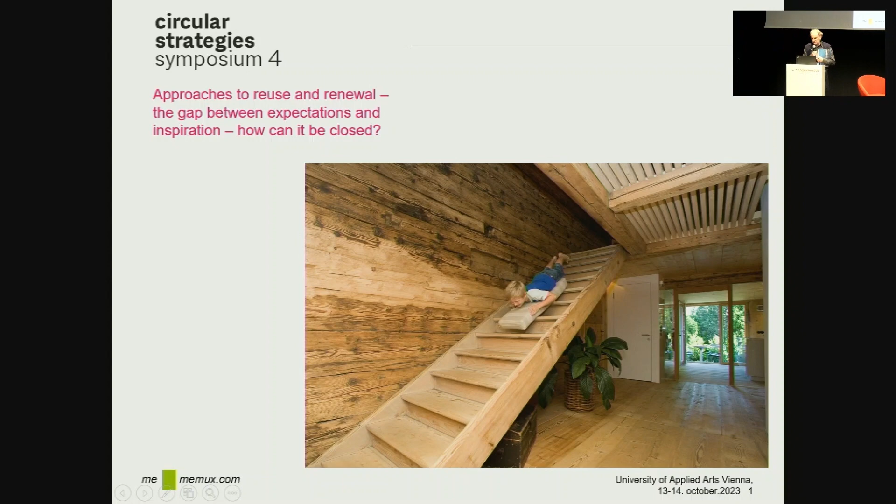It's all about low-tech, about reuse, about renewing buildings, but not only in thinking of reusing the materials or the building parts. It's more about the ideas that lie behind these construction types which our forefathers developed years ago. So I'll show you first some images of buildings, to show that by using the construction itself, the ideas of construction types of flooring, ceiling, and materials, we come to new solutions, and the combination will be the interesting part. I have to show you a lot of pictures, because only the practice of reusing things and adding new things can show that this combination will be an interesting model for the future.

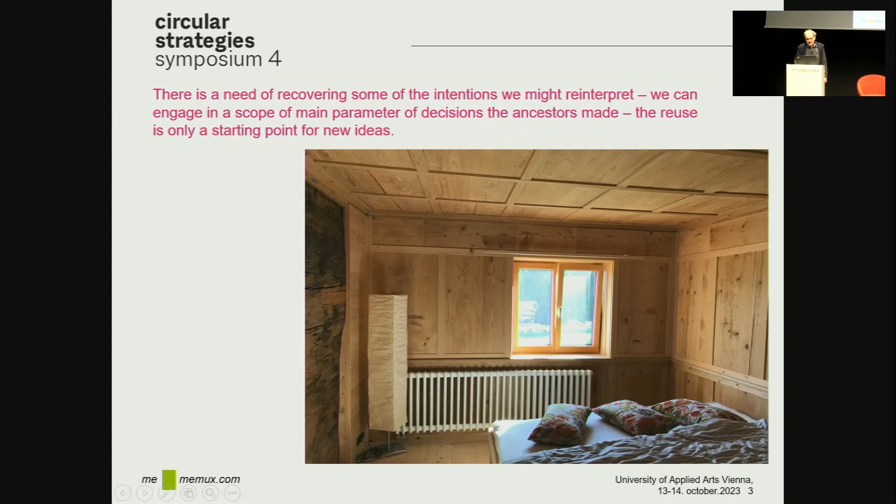I'm convinced that the surfaces of these materials and the connections, the low-tech approach, the few construction connections we need, will improve new design and will be interesting for each other to find potential in these kinds of things we find.

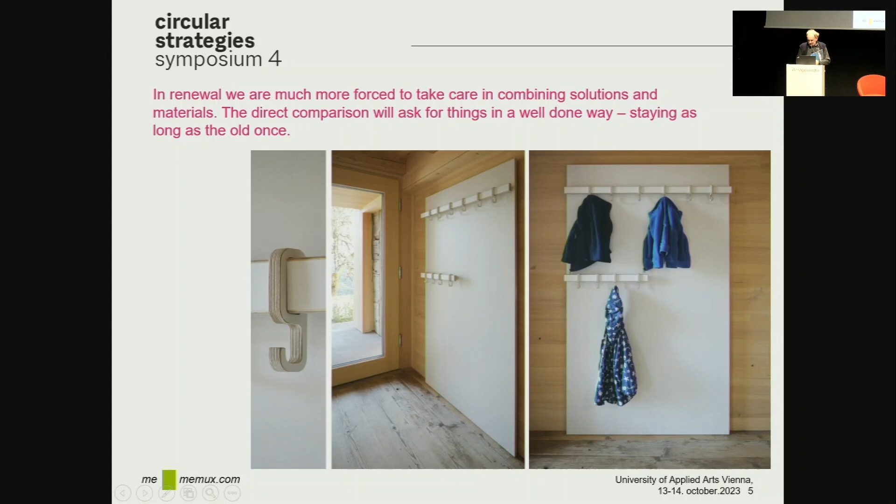So I'll show you combinations of materials and developments we did with craftsmen, who were very interested to do this because of the research I did before. I could show them things they didn't know either, because the last two generations, my father's and grandfather's, had lost some things, and we could show that there were interesting solutions even 400 years ago.

So the main approach is about dendrochronological studies. One colleague of mine, Klaus Pfeifer, did studies of this kind. He's worked on this for 20 years, more or less, and together we did a lot of research in buildings like this.

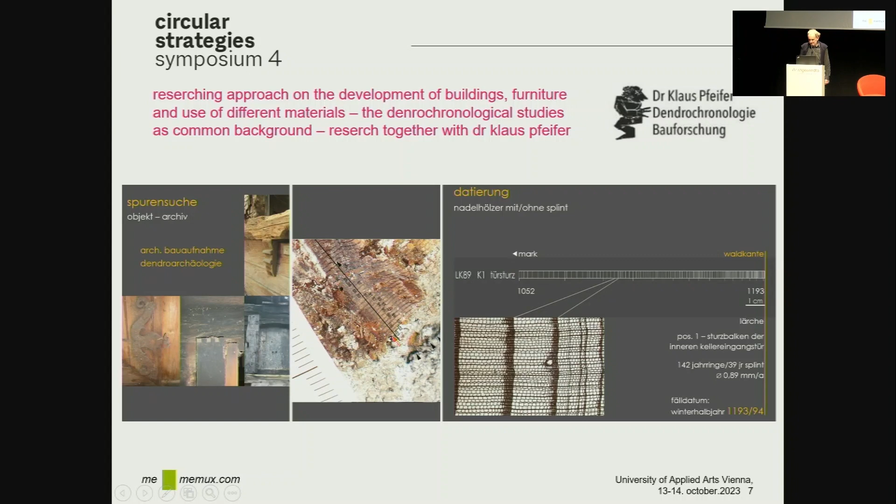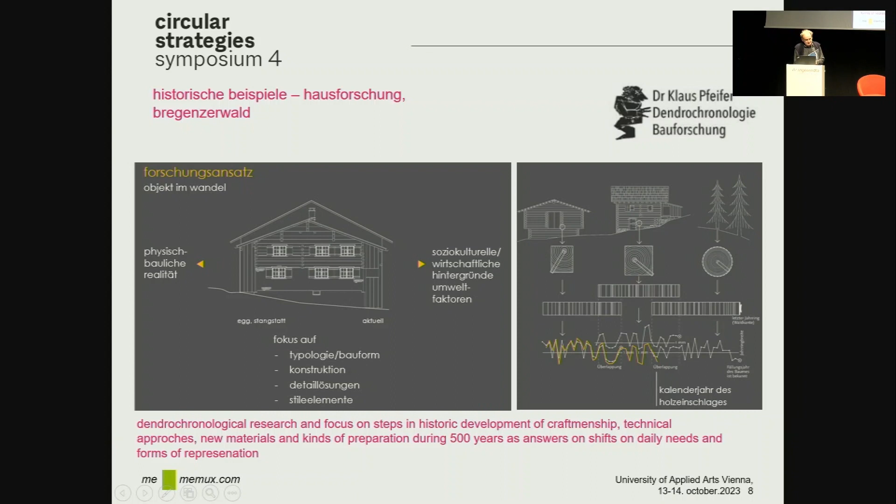So we can explain what happens in a building like this. There are more or less 3 or 4 renewing steps, and these renewing steps always reflect the development of craftsmanship, new needs, and the demographic and cultural development. We can show that in one of these buildings there are more or less 3 or 4 steps, in the Bregenzer Wald.

That's a common strategy: to renew and use the old construction by overlaying it with new possibilities of technical approach. In this comparison, the left side shows the 400-year-old shape of the beginning of the house, and the other is 300 years later. It was 400 years old when we researched it, but the design is more or less 100 years old, so in between there were 300 years of different interventions.

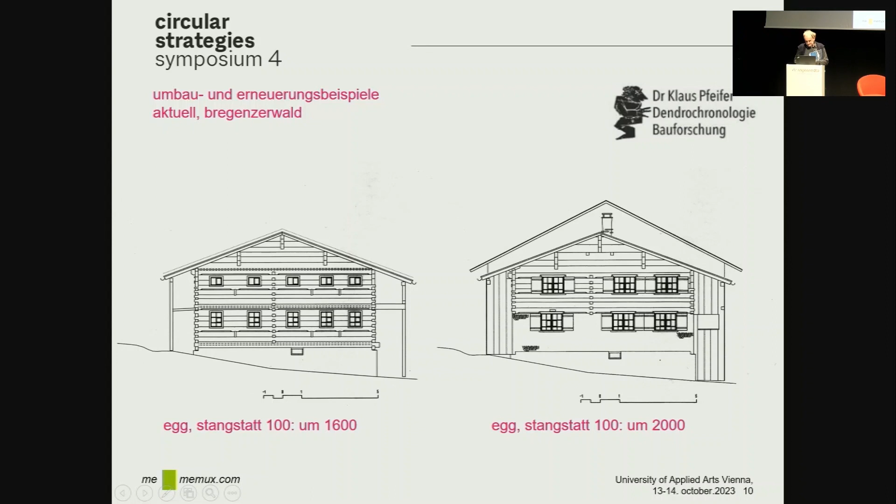Here's the next step. If you know the culture of building in the Bregenzer Wald, at the end you find housing like on the right side—the typical image of a Bregenzer Wälder house. But we researched the background of this, behind the timber surface, and found that you can identify the different steps of additions.

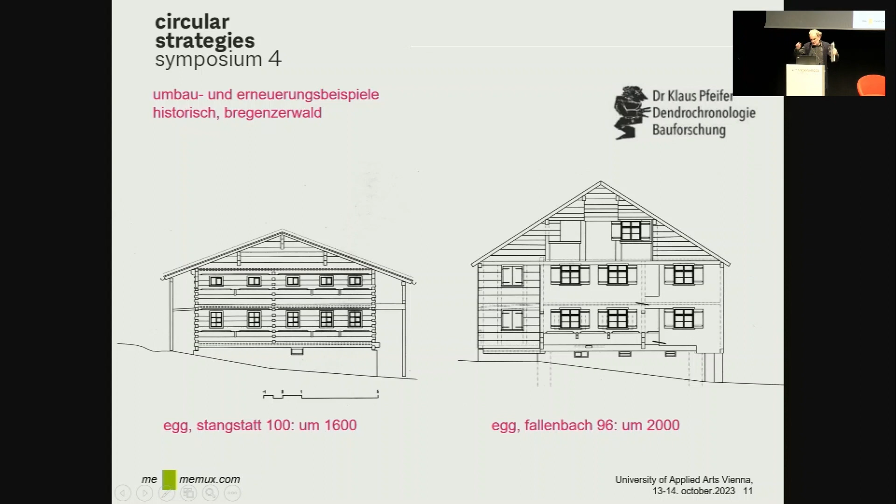The lower part is mainly the same as on the left side. Then on the right side there's an adaptation that was added with steel clamps, and at the end a huge new roof was put on. This kind of renewing and reusing is very typical for the region, I think all over the Alps.

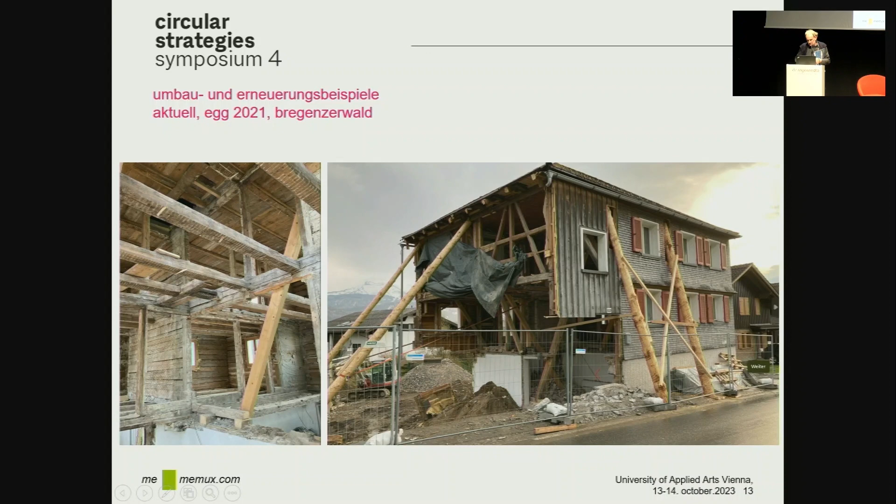So I've been doing some projects in the same way. I'll show you some examples now, not to talk about heritage and respect, but more to show that these structures give the possibilities to find solutions, to renew and reinterpret them, to interact with these solutions to create new spaces, new constructions, and even new surfaces—all the architectural approaches we need to develop.

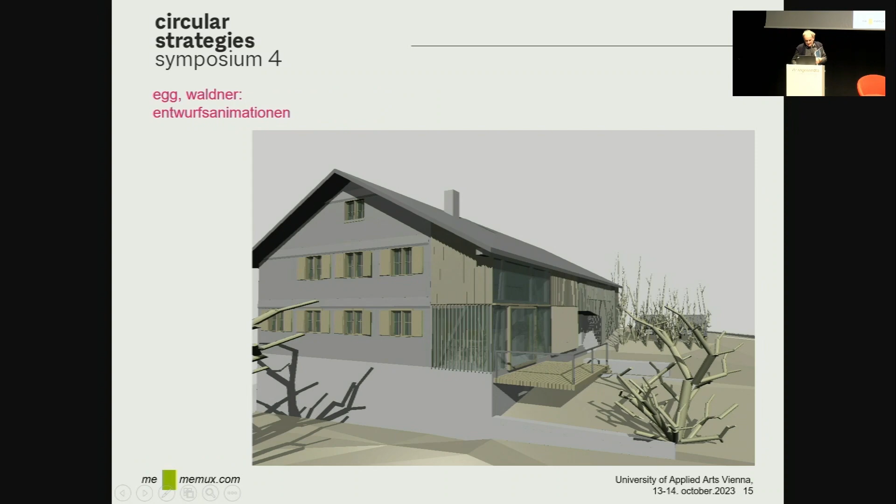Here I show an example I did a lot of years ago. You see the renderings we did, early simple renderings at this time.

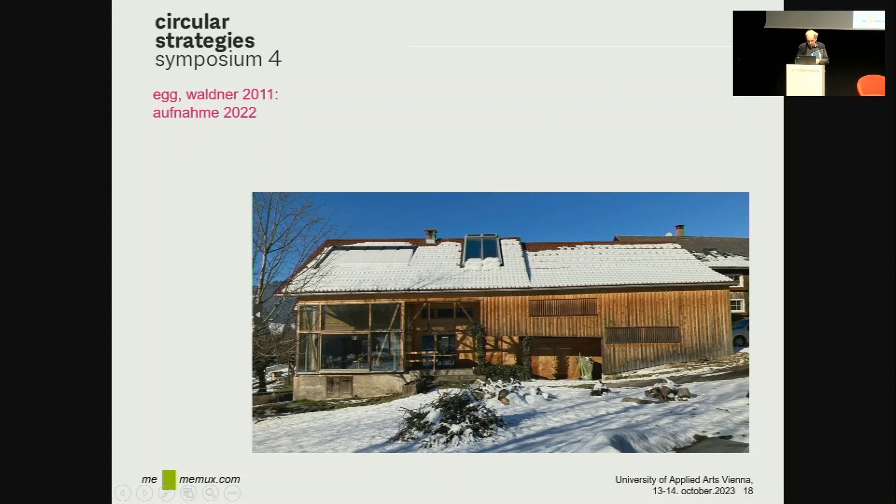I think that's the interesting, even to deal with tiles. We did a new stove with these tiles, and we combined all materials in a very assembling and easy character. So I think it's worth, or it's the main option to practice this.

You have to really search for the main characters, the parameters of the materials, and you find the solutions, as Yves told by the construction view. I think it's also in the view of the surfaces very interesting to keep them, to re-engage what the forefathers thought about in using these materials.

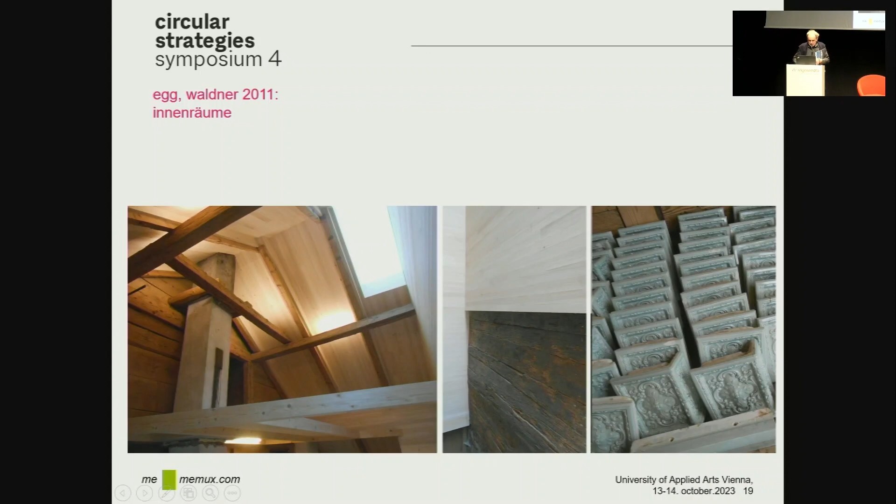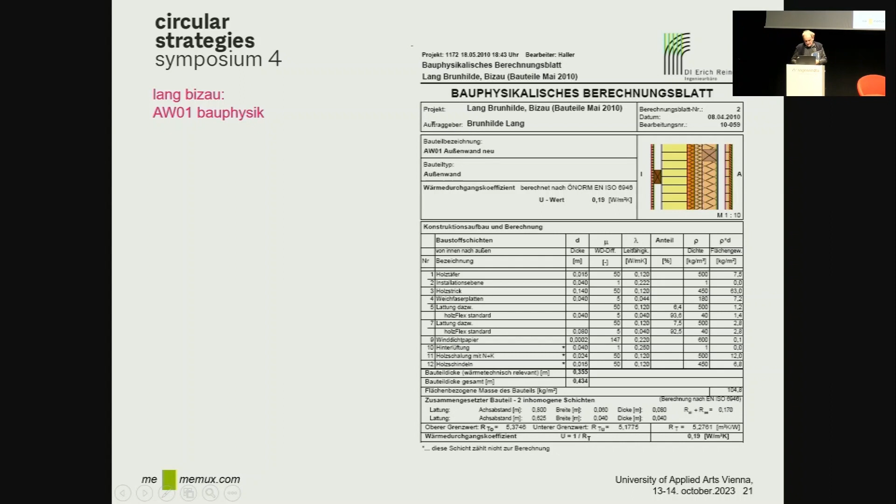We do analysis for sure. We have to do, like it's called Energieausweis, the U-value, how is it called, these calculations. So we don't hide from this kind of things. Either we try to do calculations, we try to show that it will function in future too. All this moisture stuff, moisture barrier, and all these things we try to avoid. So we think that the wooden trunks and the massive wooden walls could keep these things out or have a good transport for all these moisture things.

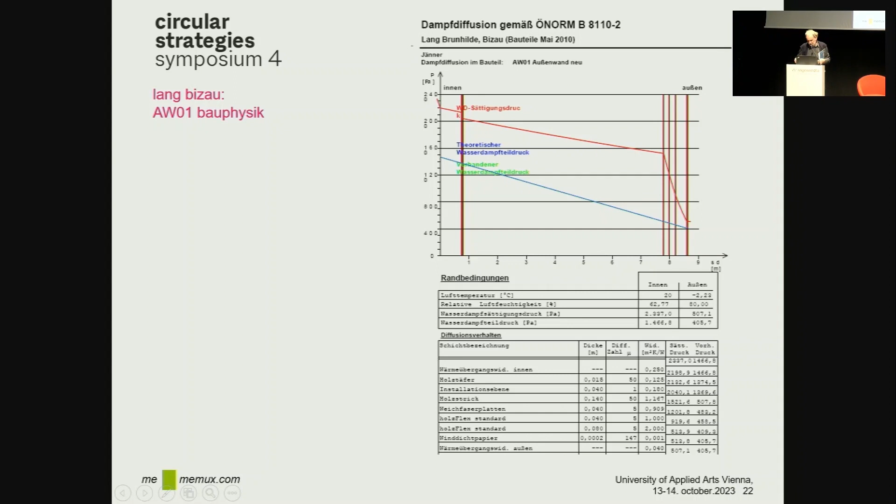Yeah, now I come to the house I did for my own. It's a typical Bregenzerwälder house, farmer house with a barn at the back, and the front house is the living house part. It's all under one roof, and we had the chance to buy such a house. The part in the front, for the living part, had one family, and we could add things in the barn in the backside.

So we did there a house-in-house concept because of the construction, which was more or less 150 years old. I didn't want to go to the walls, I didn't want all the physical problems at the construction, at the wooden construction, so I did this house-in-house concept. Yeah, we did at the end 3 flats, 3 apartment parts, one at the front part, one at the attic, and the third one there where we live now in the back in this barn.

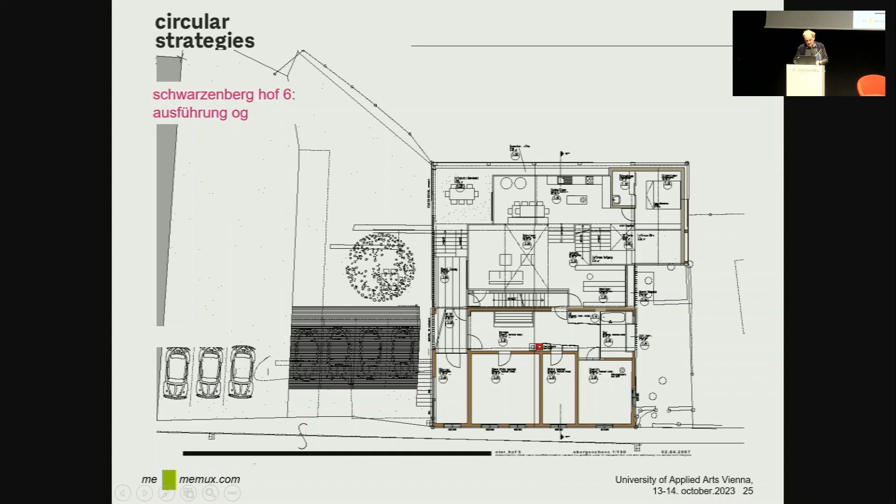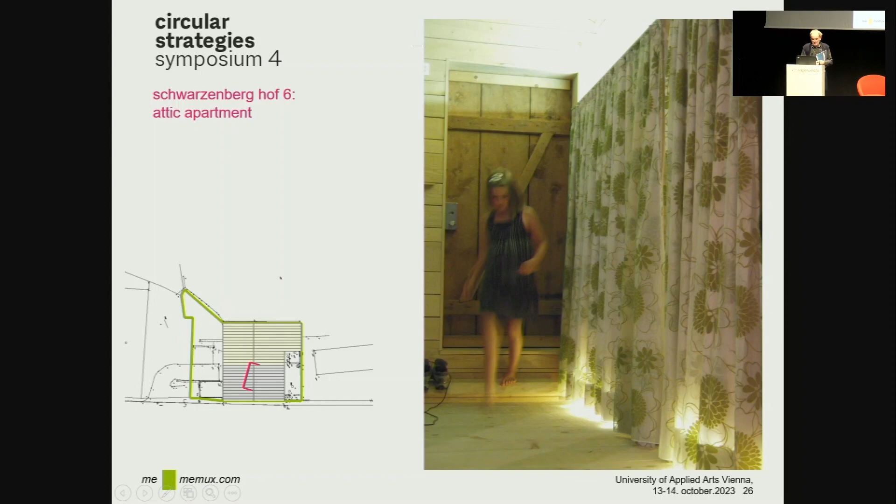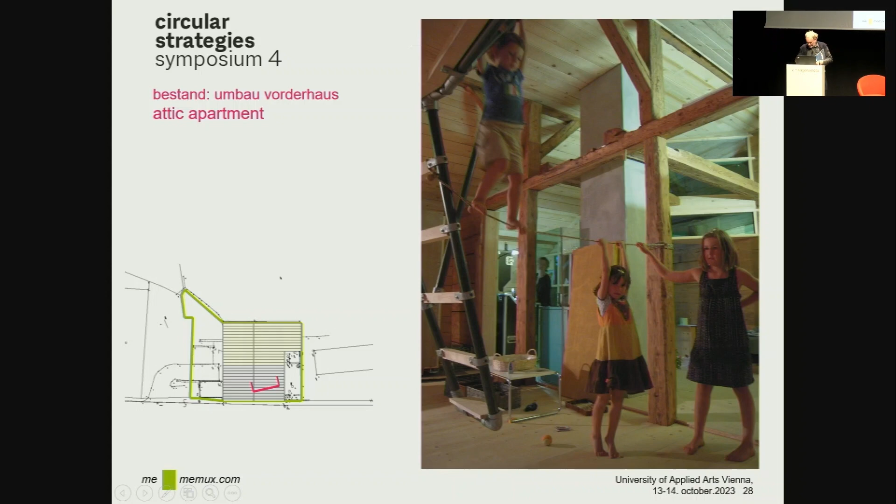Yeah, I show now some images to show you that it would be very inspiring to work with these sites, to have the rooms, to have the space under a roof with huge spans without any columns and like this. This is still old, this is not new. So we could do very free planning inside of the things, and the children still liked it. They were allowed to do a lot of things which normally is not allowed in these rooms because they are very rough and very easy to treat, and even to clean it's not that problem.

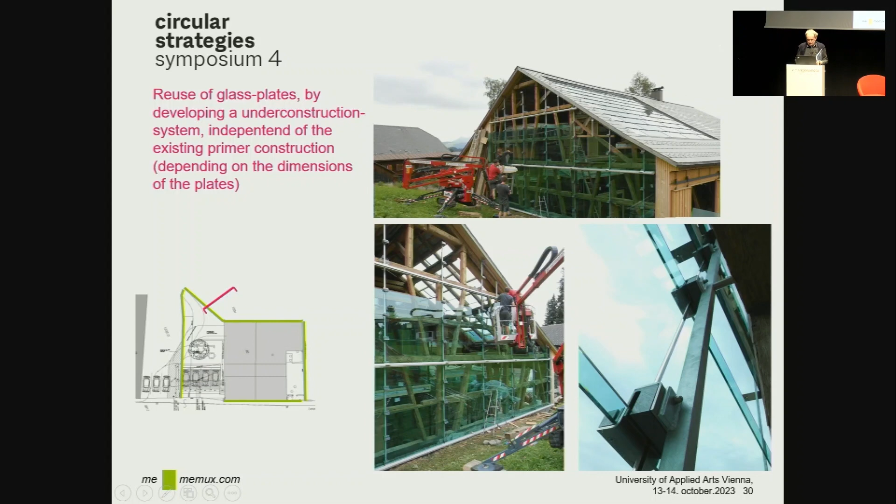So at the end of this part I show you that it is also added by new parts, steel construction, glass plates which are reused, which I could buy, and so I had to do a new second construction in front of the construction of the wooden barn.

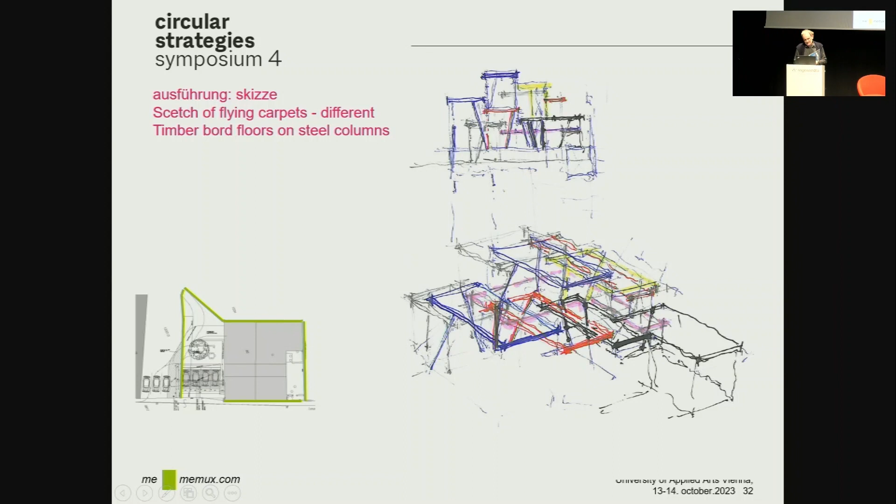Well, I will show you now a main part of this project, which was the development of a wooden floor plate system, which I found in all the houses about 1600. All these houses have the same roof type as I did here. It got lost by the craftsmen, by the carpenters, and we first did this 10 years ago. We tried the same construction type, which we could call a strained board floor.

It's about a conical board which is put into the part. It's important to read this sketch. You see there, I did the signature to this part which is conical, and this is the final part you put in. So you had to push it in at the end, and so it will strain itself.

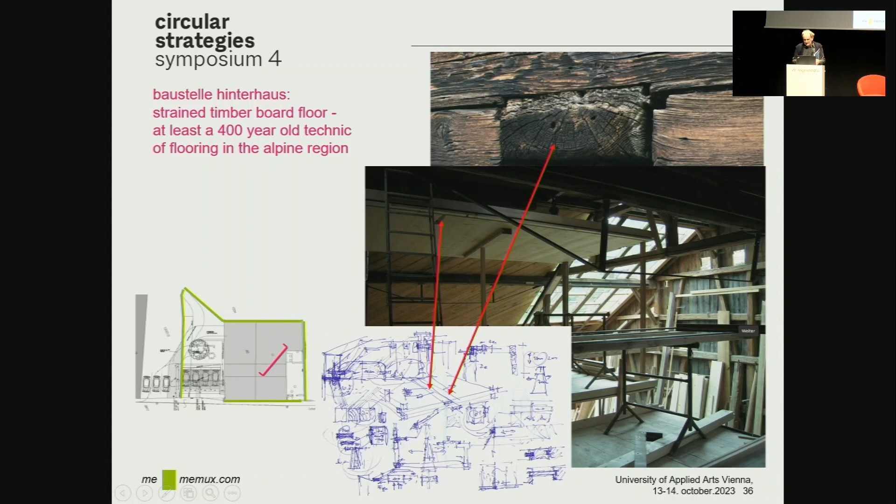It was a well-known technique, but it got lost, I think. And the carpenters of my father's generation didn't know this technique or didn't use this technique. And we started to do this in my house because I wanted to show that this still can be reactivated, this technique, and we can show that it would function nowadays too.

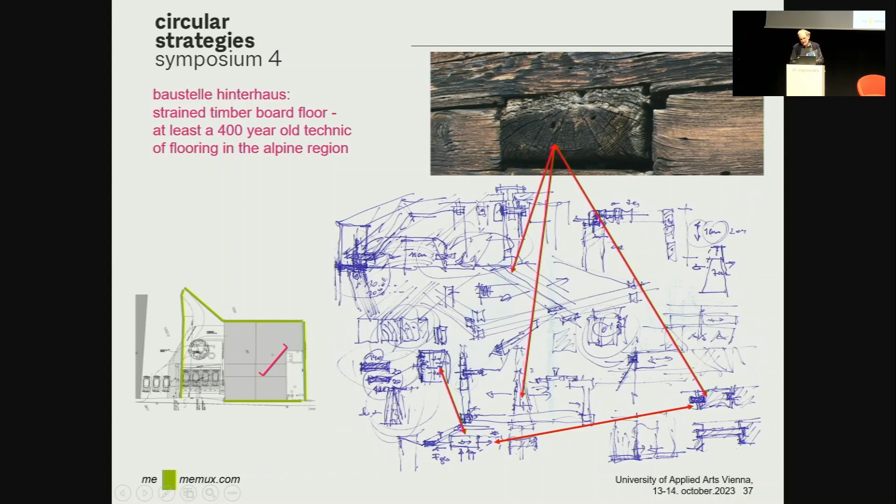Yeah, so it's a big amount of knowledge. What happens by a strained board flooring? It's too much to explain, but you see that we thought a lot about what happens, what has to be done by the craftsmen to come to the same solution as the people 400 years ago. Yeah, and so we searched what would be the advantage, and we found in old books, and they still are the same, the same knowledge.

If you use these trunks in this way, like Eve told, if you have the annual growth structure in a good combination, it's much more stringent, and so you have 20% more forces you can load if you use the wooden trunk like this. I think it's nearly the same idea, but 400 years ago people were thinking that it's good, and so we tried to do it in the same or a similar way.

You see it now at the flooring below. It still is there, the conical board which we pressed in. At the end, we could strengthen this whole floor a lot.

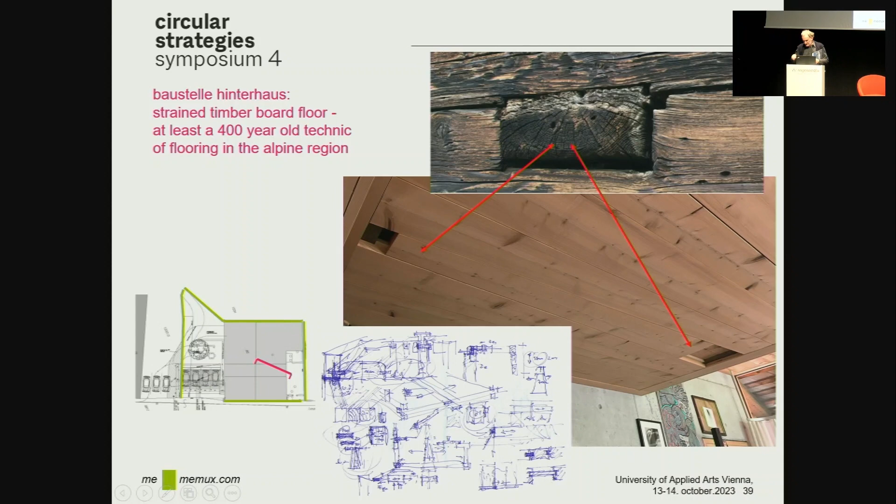We did one thing different to the 400-year-old technique. We didn't have a wooden frame, we did a steel frame, which was much more effective. So we expanded, we strained it in a steel frame, and for me it was like carpets laying on small columns.

So we did a lot of construction renewing, always in kind of low tech, with for example wooden nails instead of steel screws, because the thickness of these wooden nails would be the same as 20 screws. So it's low tech and simple technique. If you have the right carpenter, you can do this anytime.

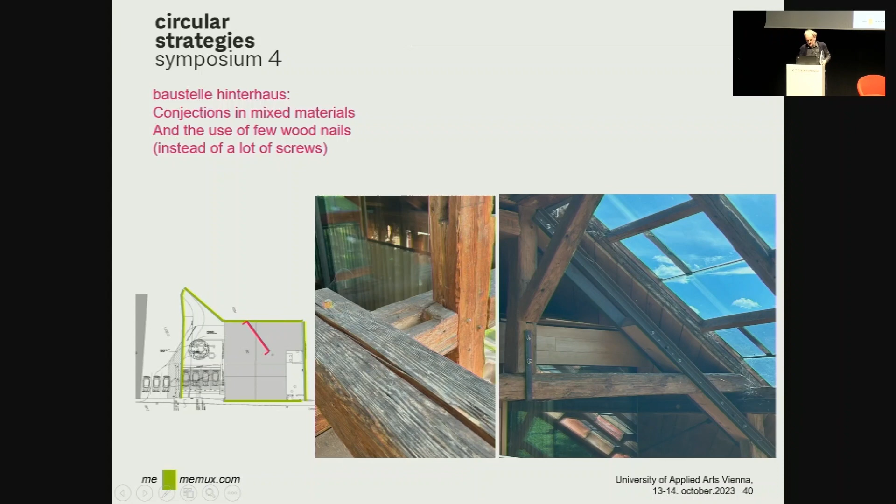So I used a lot of things which were in the house or which were being thrown out on other sites. There's a church floor at the right side, there's the staircase we reused. These are all things where we didn't use any screws or something like this. They are only leaned on the walls.

We did a lot of this stuff, and each decision was to know what would be better. I'm not against new solutions, but if you know what a natural stone wall can be different to a concrete wall, you know that the moisture in, out, and all these things are very much better.

So if you have a concrete wall, it's dead, it's still mass. And if you have a natural wall with plaster, there is always an interchange of humidity from the inside to the outside and all these things. So there are advantages, so you have to decide what's the advantage.

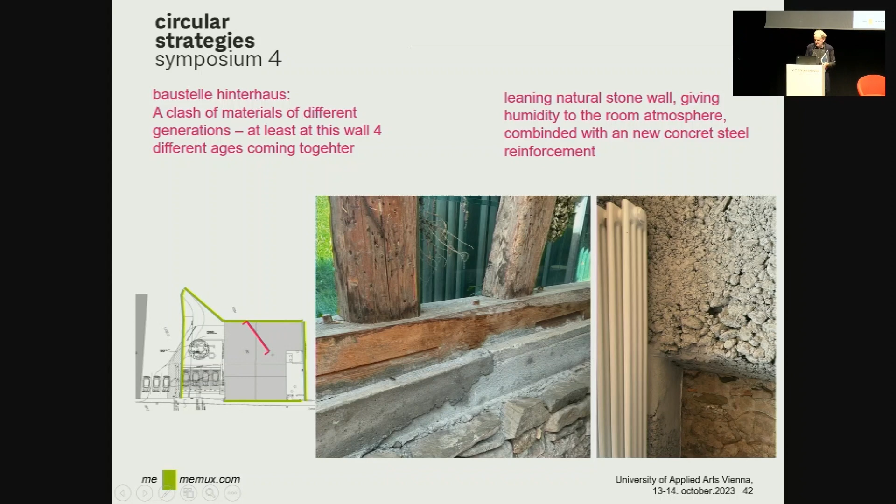Even there are disadvantages. It's not allowed on historical architecture or historical kind of solution, but it's the respect or the comparison: what's better, what could be good for the new use, or what is not good, what has to be changed?

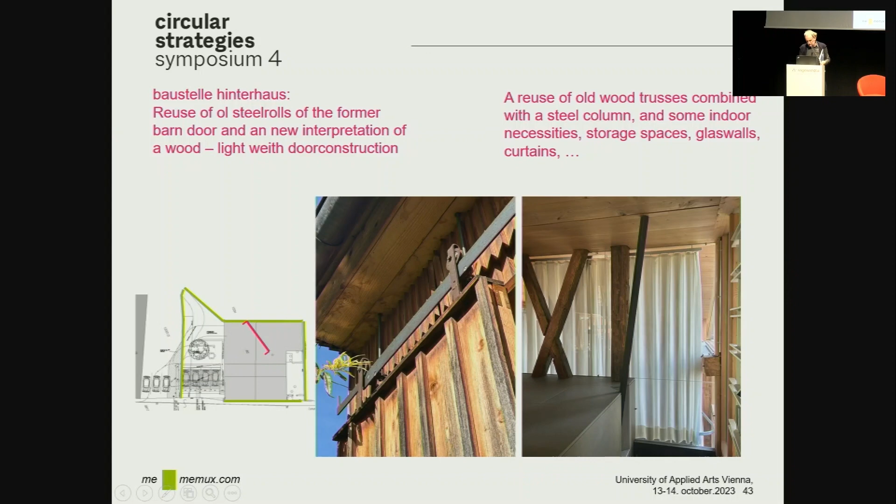Yeah, and so I did a lot of using of materials, but also of ideas. So I want to tell you, it's not a backward thinking. It's even more to learn about things by researching, by the approach of historical architecture and building solutions, so you can use it and give them new adaptation.

Not only in wooden materials, we searched and found out that there are a lot of solutions laying in the back, which only have to be refreshed. Yeah, and so it goes on.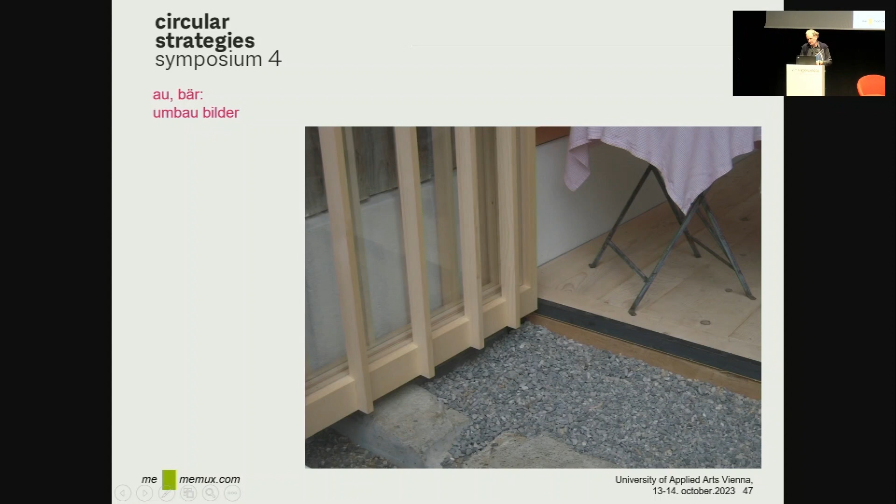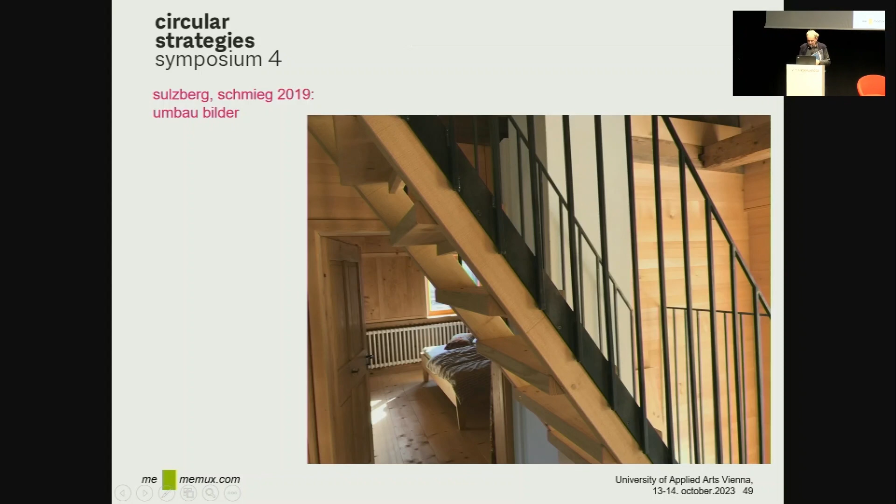It's not important, I think, but the main thing or the difference to Eve maybe is that I work a lot with material at specific detailing and the interpretation or using of materials in a more or less rough and low-tech idea. And this is where it's normally very interesting in this discussion of CO2 reduction and all of this, here you don't find a lot of materials which need a lot of CO2.

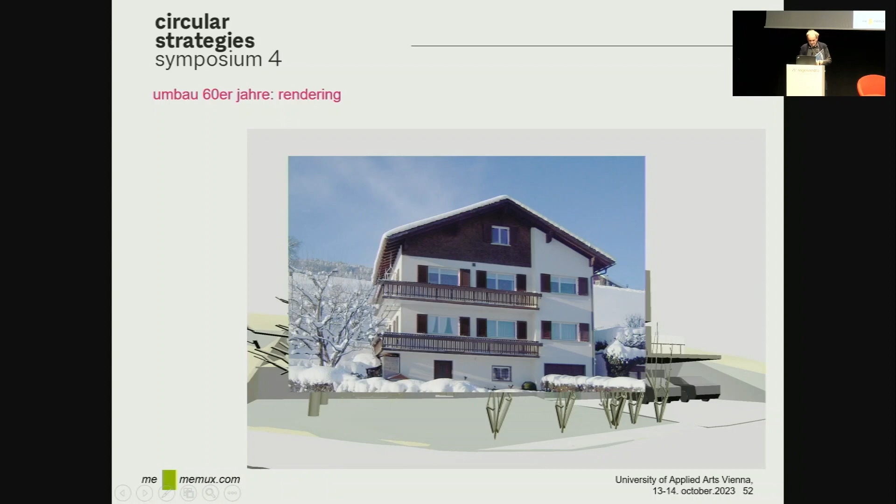So it's always interesting to get such spaces with low tech and simple solutions. These are the examples. I'm not afraid to do other things. It's even other projects I do in a similar way.

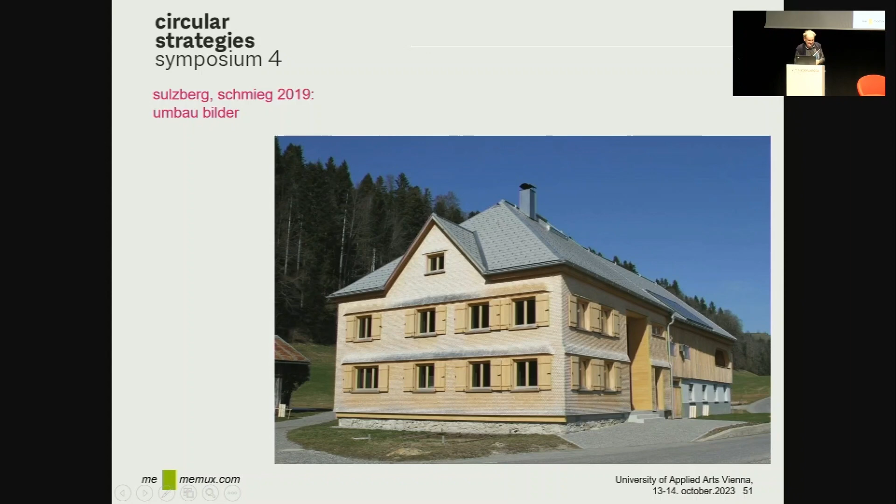So I think we can come to solutions and look for ideas really in our historical building equipment. There are a lot of ideas laying behind, and we only have to think about it and refresh what could they have thought, or what could be behind when they did something. And that's the very interesting thing I'm working on, and yes, that's my opinion and my part for this section.

Thank you very much, Thomas. At first glance, it seems to me that those two speakers have a lot in common. Both of them build upon the research of traditional craft, and then they apply this knowledge either in a low-tech or in a high-tech way. But of course, there are also differences, and I'm very much interested in the discussion panel after the next block of two speakers, where you can exchange ideas about this issue.

But first of all, I would like to ask the audience, are there any questions you want to ask immediately? If there is a question to you, could you please come up again to the stage?

Yes, it is a question for the first speaker. You talked about the jointing of the wooden plates. You did not mention, however—I'm sure you know about it—that in Japan this jointing, known as Omegushu, or in German Japanische Zinke, uses a very complicated yet simple way of jointing that can only be joined in one way, so there cannot be any mistakes. You know that most of the people who work on the building site are complete idiots, so most of the mistakes are made on the building site. That can be eliminated by this method, and I'm surprised you didn't mention it. Thank you.

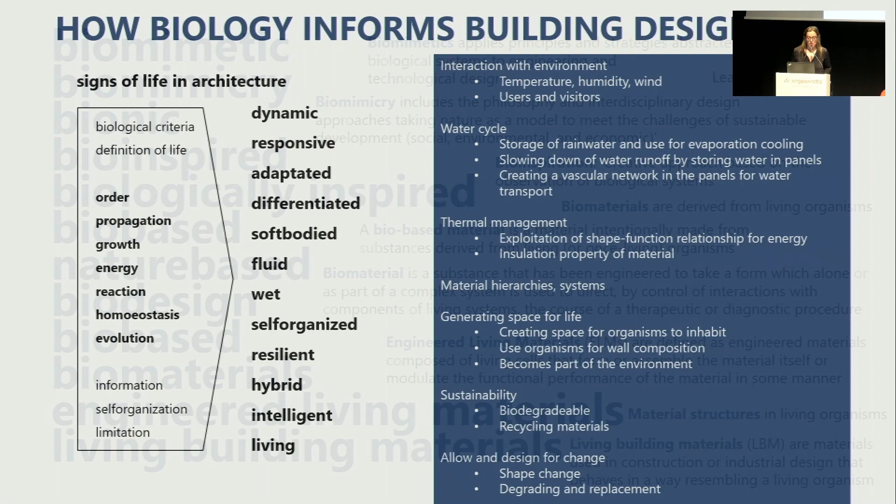So they are really very adapted, responsive, dynamic, differentiated, and so on. What we're seeking is to have those features also in technology and in architectural design, and specifically also in materials. I don't want to go through this whole list - the important thing is that this framework is still important for my work. It's been there for myself for about almost 20 years now, and it still functions as my guideline. It defines also very specifically what goes on in architectural design with interaction with the environment, water cycle, thermal management, generating space for living systems, and so on. So it kind of boils down to the very detail.

Coming to the bio what - what you see here is a range of those terms that kind of surround us. So we talk about biomimetics, biomimicry, bionics, bio-inspired, and so on, nature-based, bio-based, biomaterials, and lately we talk about engineered living systems, living materials, and living building materials specifically. So all those terms have their specific notions and have also a history.

So biomimetics is something that came up, I would say, in the late 50s, and is about transferring information from biology to technology. So it's a generic innovation method that has been used in very different fields and disciplines, starting with probably electronics.

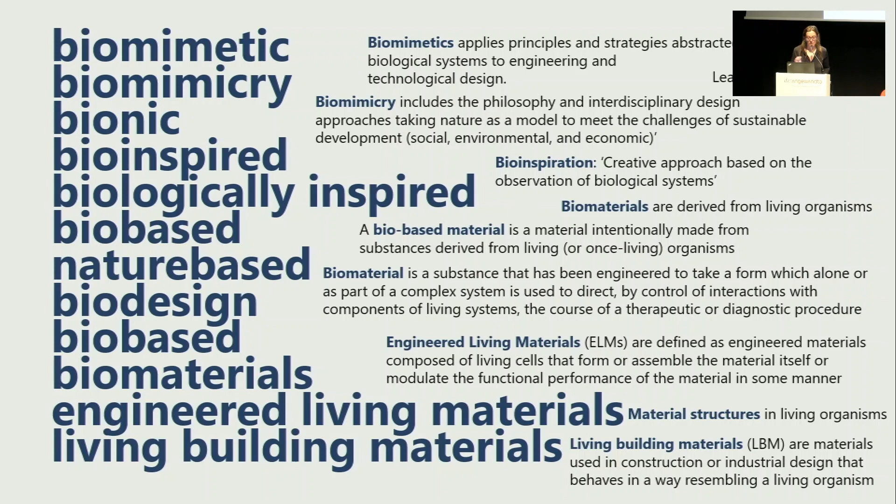Biomimicry comes from the US and integrates a whole philosophy and a lifestyle approach as well that also deals with the urge to have a more sustainable future and to design with nature. This is also integrated into this innovation methodology. That's the very specific thing I would think about biomimicry, so I don't want to go through all those terminologies with you.

It's important to see that this field is rapidly expanding, and different people develop different methodologies for their work, with a lot of methods and tools out there already. My approach was rooted in biomimetics, and I've kind of moved on to also integrating organisms into my designs and working with organisms growing materials. So I've extended my own field beyond just the transfer of information, but this is still a field that is very dear to me because I think that's where we can learn a lot.

Now I'd like to jump to this other term of biomaterials, material systems. I want to talk about this because I'm speaking in front of an audience coming primarily from the arts, architecture and technology. We have a notion of materials as something very isotropic, very small in scale, like metals or plastics, something that has very strong coherence on all levels of scale.

Biology doesn't function like that. We have building blocks, and on every scale level there is a hierarchy of structure. Most biomaterials have structural levels on at least 6 different layers, and those structures are very different from each other. You just see one example here, which is bone, but I could have taken wood or bamboo or any biomaterial derived from living systems, exhibits properties on many levels of scale. That's something we have not yet exploited at all in our technical materials.

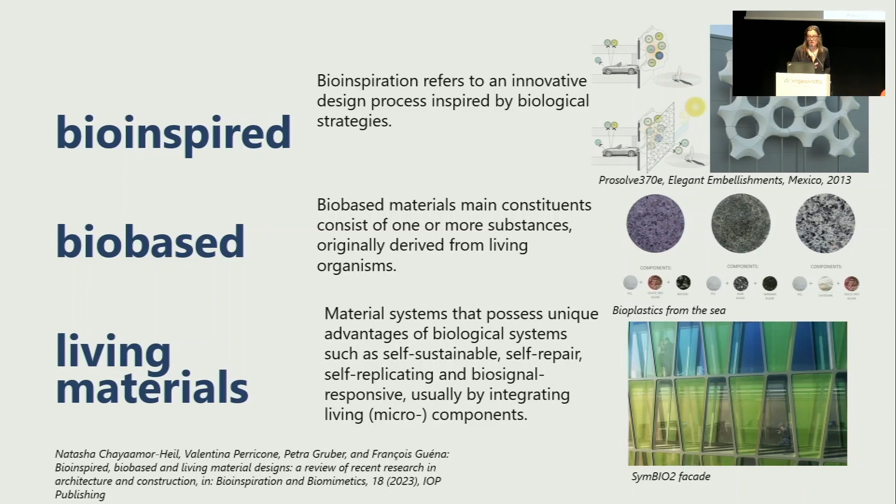And the last category is living materials, and we think of this as materials that are actually alive. We are starting to have those too in architecture, but it's essentially material systems that possess unique advantages of biological systems, such as self-sustainability, self-repair, self-replication, biosignal responsiveness, and usually by integrating living components into the material, which are usually microbial systems.

So this is something that is pretty new. We have many research groups working on things like this in all fields, like paints, like algae facades that you see here.

And using this framework, I just want to talk about one of my research trajectories, which is mycoterials, as we call them. It's materials that were generated due to the growth of fungi, of mycelium, and uses the mycelium as a binder. So what we are actually having here is a composite material.

So we have some kind of organically derived substrate that is usually a loose aggregate. For example, wood chips, could also be paper chips, straw, hemp, flax, anything that contains cellulose, and uses fungi to grow through it, and by this growth generates a lot of tiny root material, and this tiny root material that we call mycelium solidifies the aggregate.

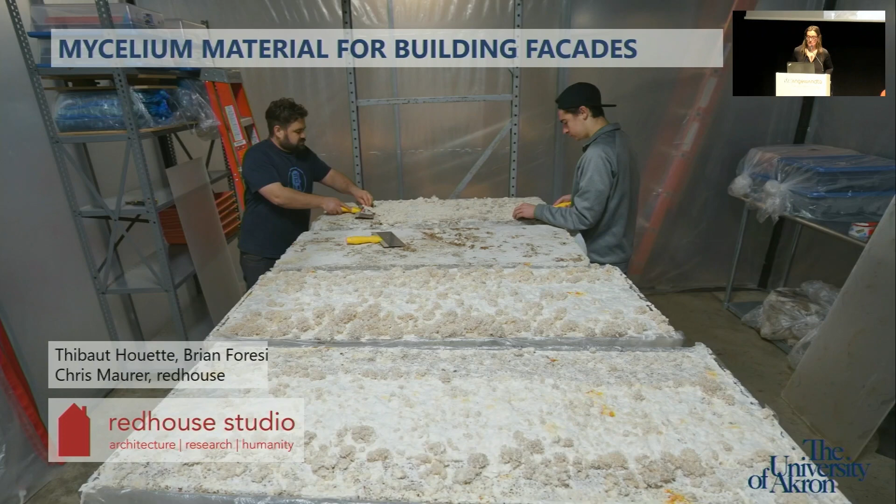And in the GRAB project, Growing as Building, we managed to generate a range of small prototypical examples of those architectural models. So when I had the chance to continue this research at the University of Akron within the frame of the Integrated Biosciences PhD program, we decided to enlarge those efforts and scale up to architectural scale. And we were courageous enough to try to produce those panels in architectural size and explored mycelium as a building material for building facades.

We collaborated with a local architecture office, redhouse studio. Chris Maurer is the head of this. You see him on this picture here, together with one of our undergraduate students in Akron. And we did those large-scale experimentations in one of his workshops in Cleveland. And we tried many things at the same time, which was probably not the smartest thing in terms of science. So we played around with different substances.

So we used corn stover, hemp hurd, flax, sawdust, soy hulls, all sorts of materials. We played around with different methods of sterilization to avoid the growth of other organisms, which is one of the biggest challenges if you want to grow something: avoiding growth of something else. This is a nightmare. One of the biggest issues we had was contamination.

The third thing was to create growth environments with different strategies. So we used frames, tents, boxes, all sorts of things. They worked differently - badly or well - so you will see those later on in the pictures.

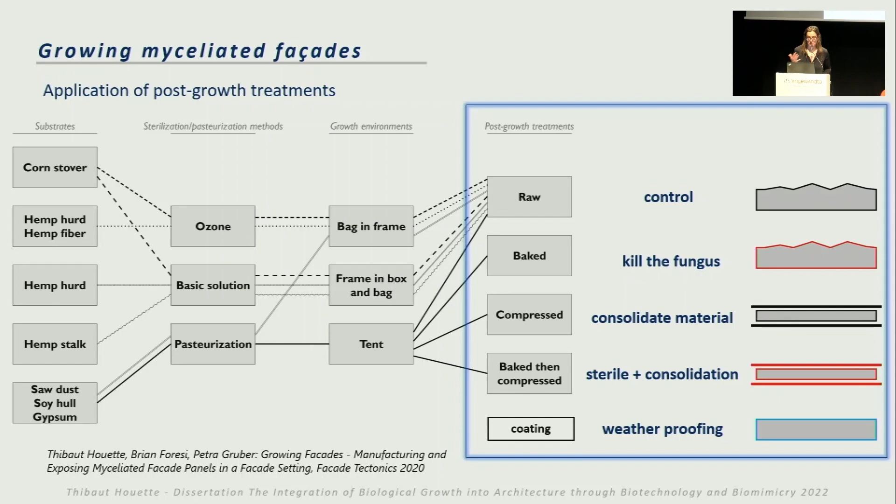We also used different post-growth treatments. I told you about the living organisms embedded in systems, but when we use fungi, we are confronted with the fact that those fungi grow fruiting bodies and then finally produce spores. This is not something that we want in an architectural environment where people live - the spores could be not beneficial to health. So what we actually want is to kill the whole system before we bring it indoors. This can happen in various ways.

So we can dry those panels, we can bake them, we can also compress them to consolidate the material, and we can use both. We can also use a coating to cover the materials so that nothing gets out, so they are waterproof and weatherproof finally. We played around with all those variables. Some of those experiments were successful, some of them were not. And we also tried to apply that in an architectural context.

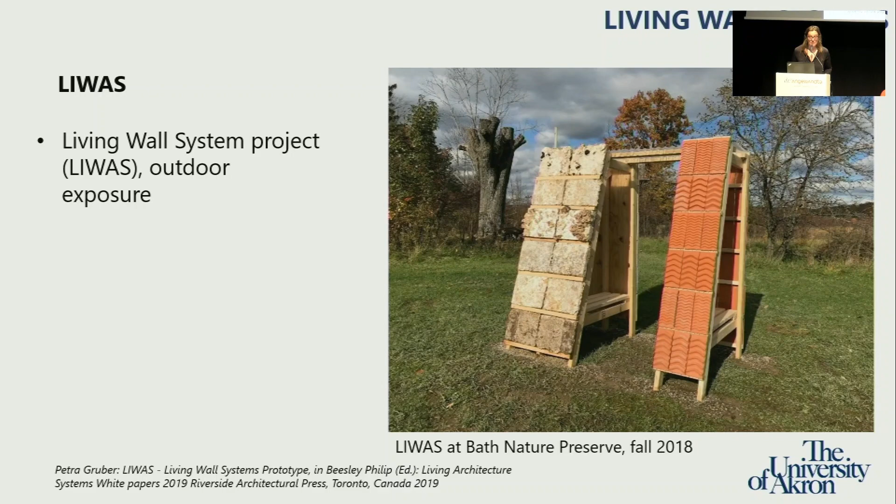Again, very courageously, we decided to make an outdoor experimentation on a small setup that we put in our field station. The advantage of living in a biology department was having a field station and being able to use this space also for those outdoor experiments. We used that also for other prototyping that we did.

So you see here also those ceramic tiles, which refer to another research avenue that I don't want to talk about today. So you see here the outcome of the LIWAS project that was funded by the university with a small grant.

We tried some improvements of growth conditions, different treatments of the panels. So we had raw panels with an interior grid to reinforce the system. We had compressed panels, baked ones, both systems, and so on. We used this setup to look at long-term performance, outdoor performance of those mycelium panels.

We did this without a very clear perspective on what we wanted to do. It was just a study that nobody had done so far, so we couldn't get any literature on it. That's why we decided to just try that.

The purpose could be manifold. It could tell us what we could then use as a strategy to really generate long-term performance for those panels. But we could also think of using this material as something that is applied and then purposefully allowed to degenerate, so it's not on a permanent base but maybe a temporary measure for certain purposes.

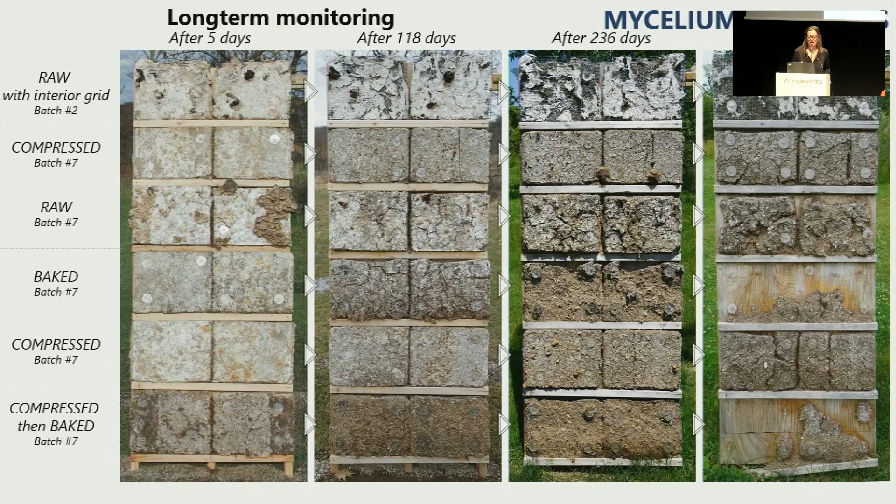We were also interested in the settlement of living organisms on those panels, which was not very successful, probably due to the fact that the rhythms of drying and wetting were just too harsh for most organisms to survive. What you see here are photographs from different time zones.

So you see after 5 days, after 118 days, after 236 days, and finally after 622 days, you can see that most of the panels after almost 2 years have completely disintegrated and didn't leave anything behind but a small heap of sawdust on the bottom. So it's something that really vanishes in the environment as it disintegrates, which is also an interesting observation.

And we can also say that the mechanical performance - pardon? Really? Oh, I'm sorry, I have to go much faster.

So the mechanical performance was really well for the first few months. Okay, we have to jump. So yes, let me jump over this discussion.

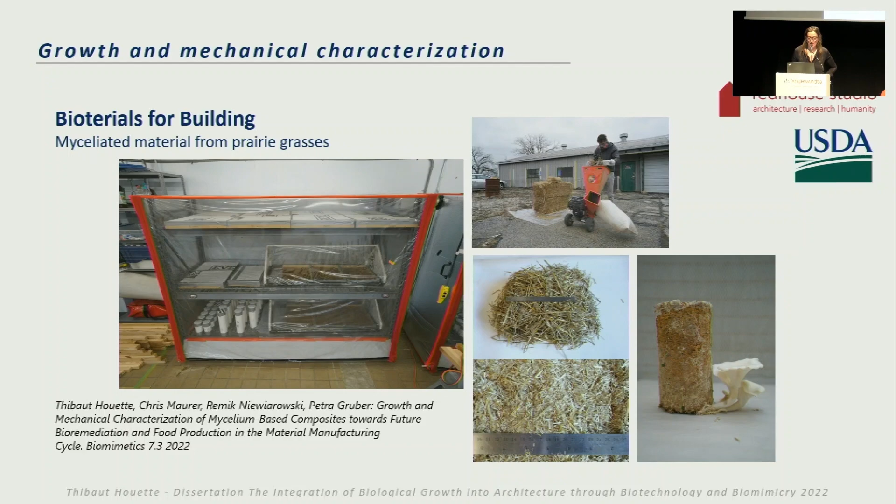We also used this for aesthetic pleasure. We put one of those panels in a faculty exhibition, and this was a really huge thing that also started to generate fruiting bodies and created a unique smell in the gallery. So this was something courageous - we did this before anybody realized that there could be spore contamination, and we took it down before we saw spores actually coming down from the fruiting bodies.

And we had the luck, or due to these first efforts, we generated funding from the USDA to make a really extensive study on the mechanics of those materials.

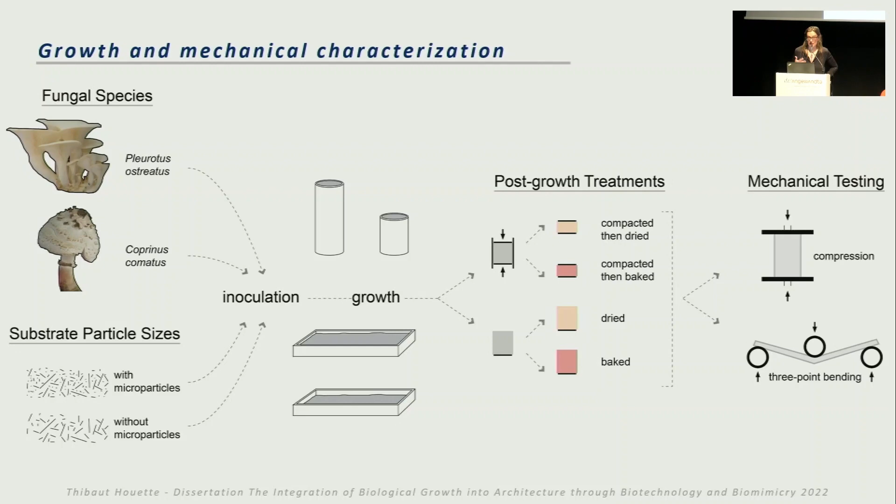And you see some of the imagery from the lab there. We again collaborated with redhouse studio for these efforts. We produced countless cylindrical samples for materials testing and countless rectangular samples for bending testing and impact testing. You see some of the procedural activities here. This work is all published, so I put some of the papers on the slides.

Our interest was to understand, on a more scientific basis, the post-growth treatment, improve the growth conditions, and then also get hold of the mechanical characteristics of those materials. Here again, some of those assessments on the way. Interesting also the harvesting, so we also looked at the fruiting bodies that were harvested during that time.

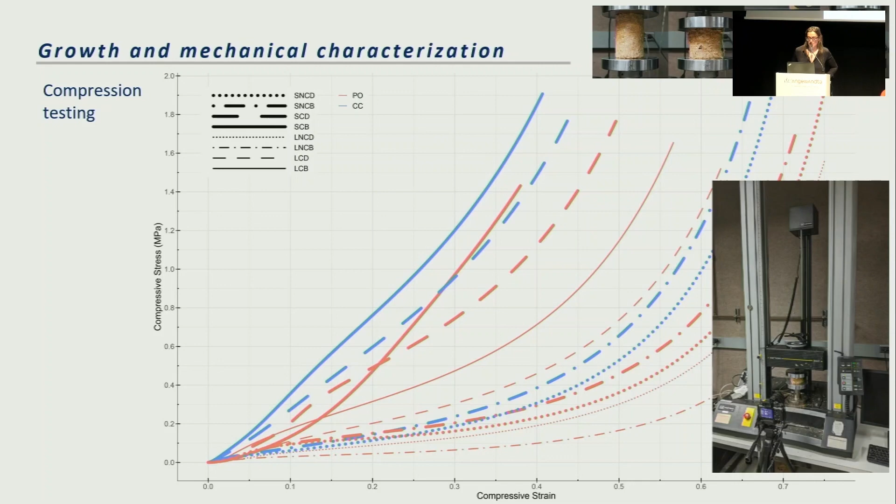And finally, the compression testing results. You see that they differ according to the treatment and the growth conditions, and also the composition of the substrate. So this is all published material. If you want to continue this research, you're welcome to download all this and get the reports from me personally to continue our efforts.

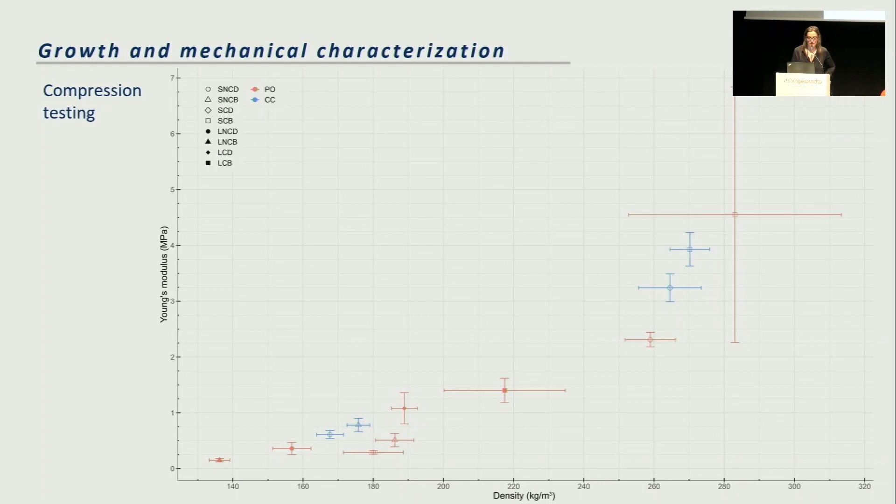And you can also see that in the compression testing, there is no such phase like complete collapse. This is also interesting. So this material does not collapse. It's a material structure, and it has a certain elasticity and kind of bounces back. So there's a certain hysteresis, as they call it. It's not something that usual building materials exhibit.

So we kind of had some major findings. The density correlates with compressive resistance and so on. So there's some kind of major statements that we can make. But in general, you have to really look at the boundary conditions to tell something about the resulting material.

We also embedded this in an existing framework of circular use of mushrooms, like producing mycelium-based materials in this cycle that was published by Paul Stamets, one of the fungus gurus. And so we added an extra function to his piece.

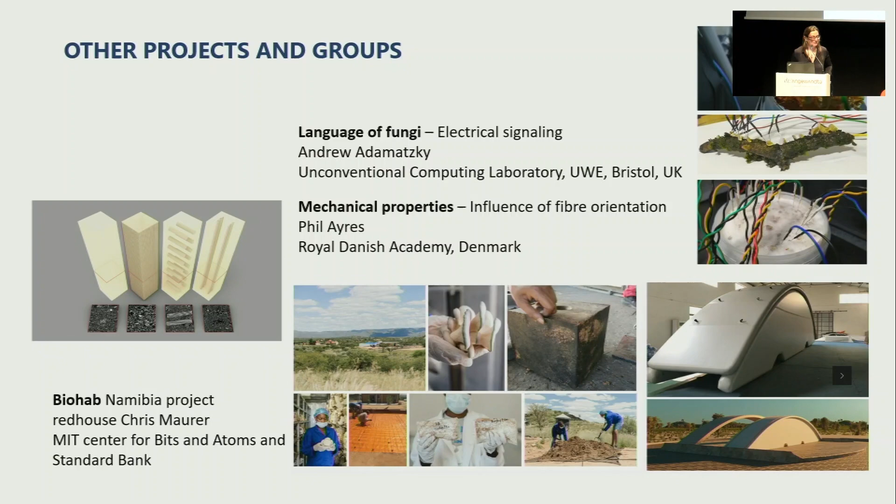There's many other research groups active in the field, working on different challenges. The Bristol Unconventional Computing Lab around Andrew Adamatzky works on the sensing capacity of fungi. So they want to discover the language of fungi. The electrical signaling is kind of transmitting information. So the visionary idea is to use those fungi also for information technology.

And the Royal Danish Academy is working on the mechanical properties and structuring. And Chris Maurer from Red House is working together with MIT with a huge facility in Namibia that they call the BioHab project. And they also want to use this for space exploration. So it's very exciting stuff coming along.

Okay, and then very quickly the challenges: inter and transdisciplinary work, working with other disciplines, complexity of biological material structures, maintaining the lab environment, I already said that. Scaling up to production is maybe the biggest issue, lack of standards and new production processes. As I said, there's tons of publications out there.

Among them my own, so you find everything on ResearchGate. And my mission statement, which is to expand the design space, not only to nanoscale, but also to take on the opportunity that we as architects are trained to solve wicked complex problems, to also go into biological, social, cultural, and political questions with our domain. And with this, I want to thank my research groups, my collaborators, the institutions that have hosted my work, and I want to thank you for your patience and attention.

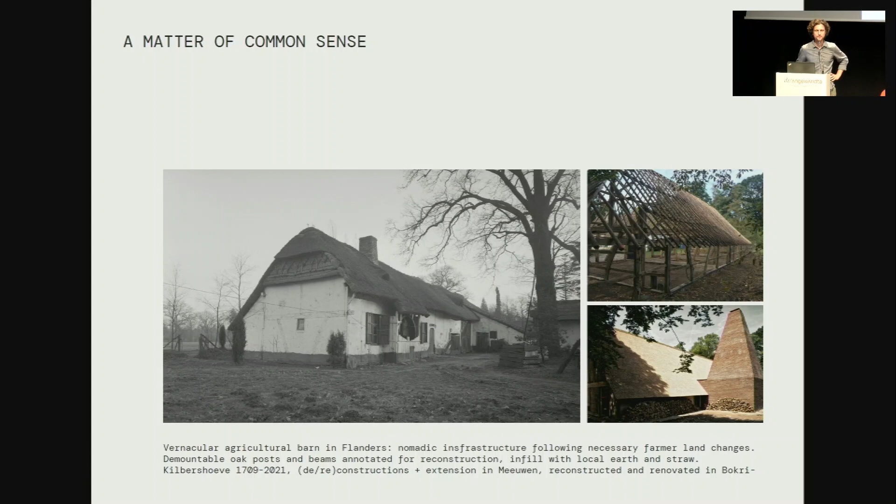Just very quickly, to talk a little bit about what kind of conversations are going on within our group of people working on these topics, I tried to summarize it in one sentence with different lines. It has always been a matter of common sense to design for the long term in scarcity. Circularity is not a miracle. We talk a lot about what is circularity, this new buzzword, should we go for it or not, how can we be critical and so on. So for us, that's something that lives a lot.

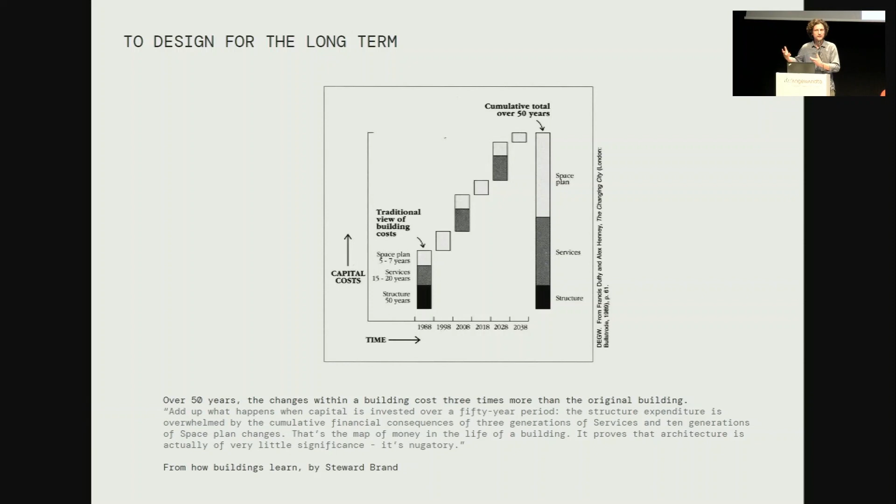A matter of common sense - I really love this example. This is what we call a wanderer's barn. It's an official term in typology, discussed in the heritage sector in Belgium and Netherlands. In fact, it's a barn with numbered oak beams and earth and straw as infill. This barn traveled every few years to where the farmer needed his infrastructure close to his land. The barn was demounted, earth thrown on the ground, straw thrown on the ground, beams demounted, taken to the next place and remounted, again with earth from that new place as infill. Super common sense, nothing high-tech about it, just plain common sense is what we should do.

To design for the long term - I think one of the best examples, understandable by everybody, of how we are unbelievably not taking time into consideration is the building cost. We only calculate the building cost at the start of a project, but if we look at it over time, just looking at the economy, and then extending to ecology, the actual costs of a building are much more over its life cycle than the initial costs. So if we invest more in the beginning, economically and ecologically, we can also have more gains. If we do better things in the beginning, we can have more value later in the life cycle of a building. So we have to design for the long term.

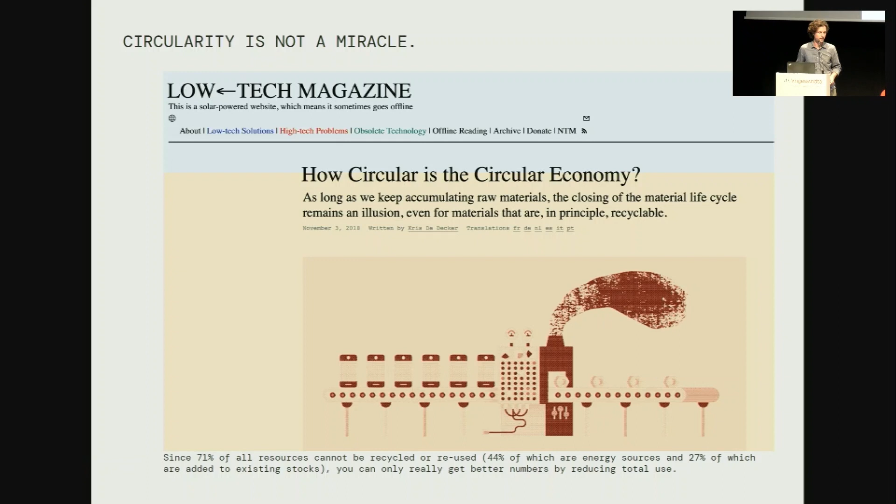This is, by the way, a very nice website, Low Tech Magazine, a super inspiring website with lots of interesting articles where we took this information from. So what we think is we need to transition, we need systematic change in doing things. That's why we need to work on all fronts a little bit at the same time.

For us, what we try to do is work very broadly in our projects, touching on all processes—not only design and construction, but also knowledge, education, and so on. Prototype, as I heard in the first lecture, making things together is a crossroad where these topics can come together. So this is what we want to develop: architecture as a prototype, a process that never stops. A building is never finished—it has an end, and then it keeps on living as certain types of waste. We have to take this into account and focus on the process of construction.

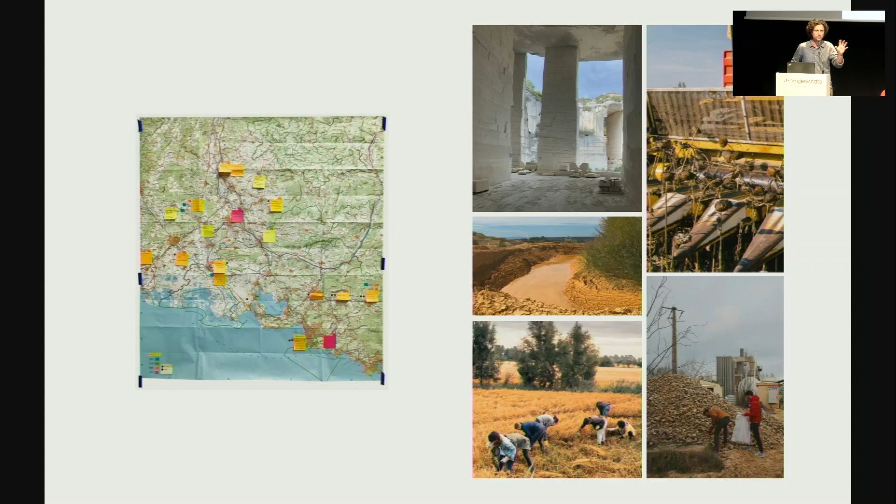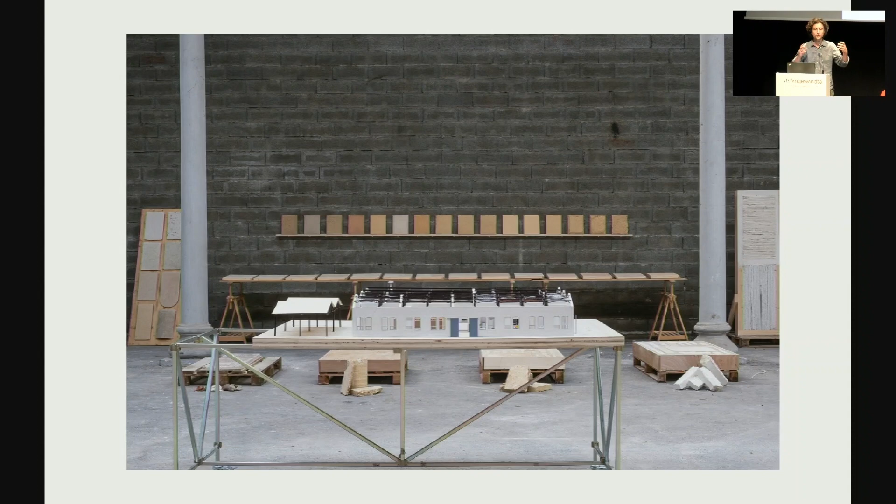Here on the bottom left, we have rice straw from the region of Camargue around Arles, where there's rice cultivation with problems of agri-waste handling. Currently the waste from rice straw cultivation is burnt every year by farmers, but it's actually a high-quality straw you can also use for construction. On the right above, we see sunflower harvesting—the first time we worked with it. It's a super interesting material: the sunflower head becomes a kind of polystyrene, but bio-based and bio-sourced, when you shred it, and the stem creates very strong fibers.

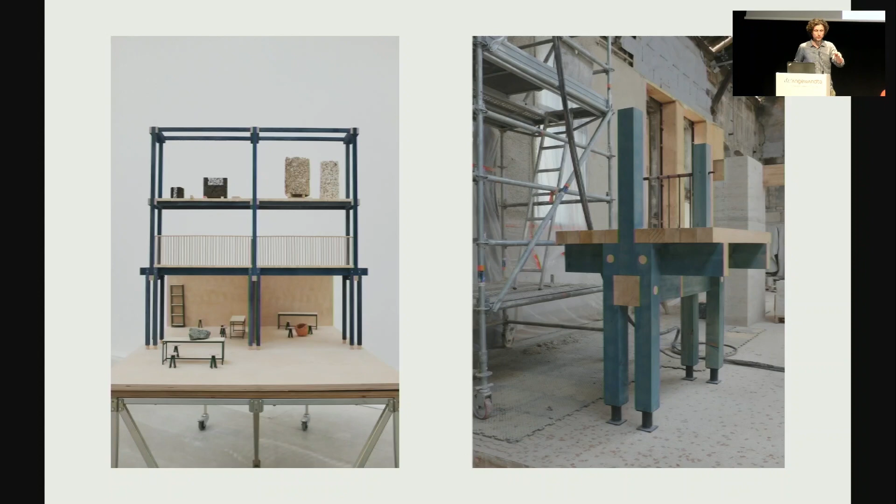Here, wood that was sourced from the Jura forest, where we went visiting the forest managers. Here painted with an algae paint—algae also grows in the Camargue region. And then in the end it becomes the structure of this divider that defines the space with different kinds of workshops under it.

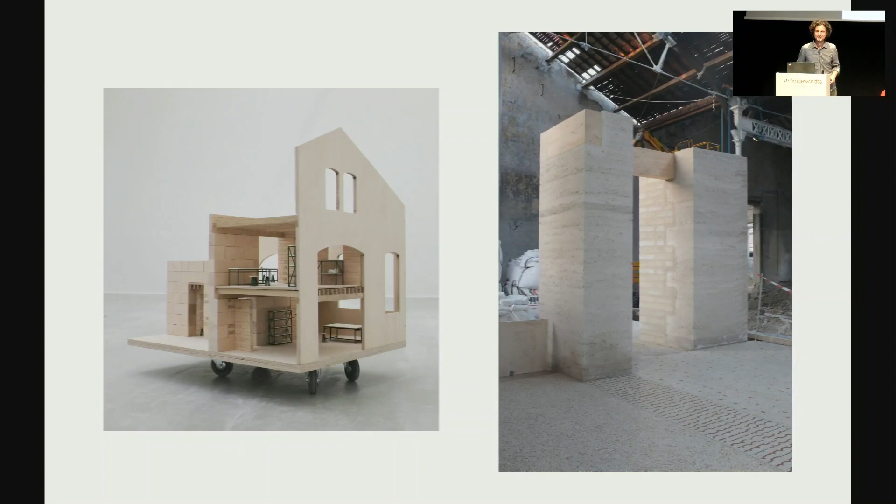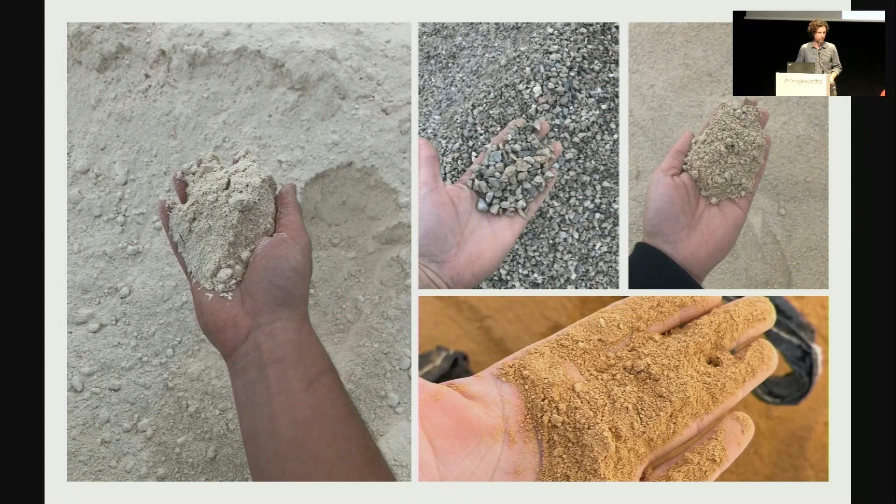The rice straw was used, of course, using bales of rice straw—lots of volume—as insulation on the inside of the warehouse. But also, with a hot press functionality, we developed rice straw panels that were used as a finishing on the inside, up to 1.5 meters high.

The waste from the stone dust quarry was used as one of the main ingredients to make a rammed earth mix, so you see it's a white rammed earth mix. It's quite special for rammed earth to be so white, but it comes mainly from the debris from the white limestone quarry, which resulted in a very beautiful white rammed earth. We didn't search for white, even though we're architects, but we were very happy to discover it.

So on the left you have the stone dust quarry, and then some other resources—the crushed buildings, the clay that was dried up from the sand washing, and so on.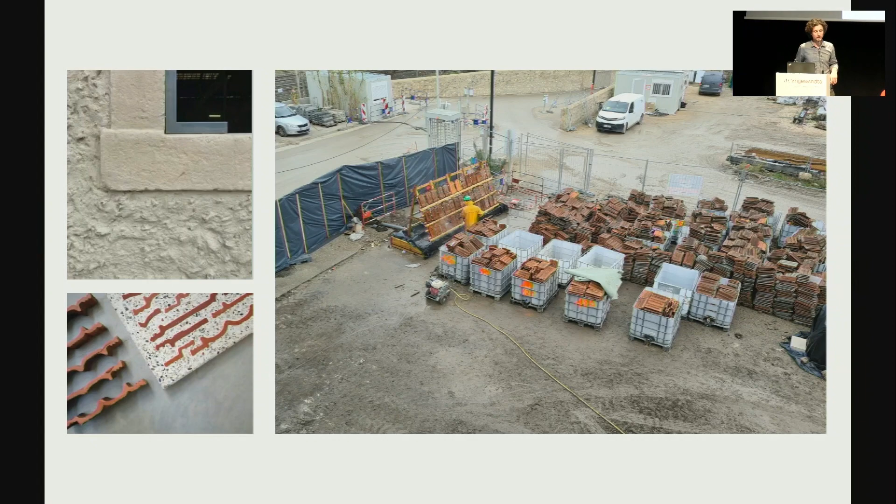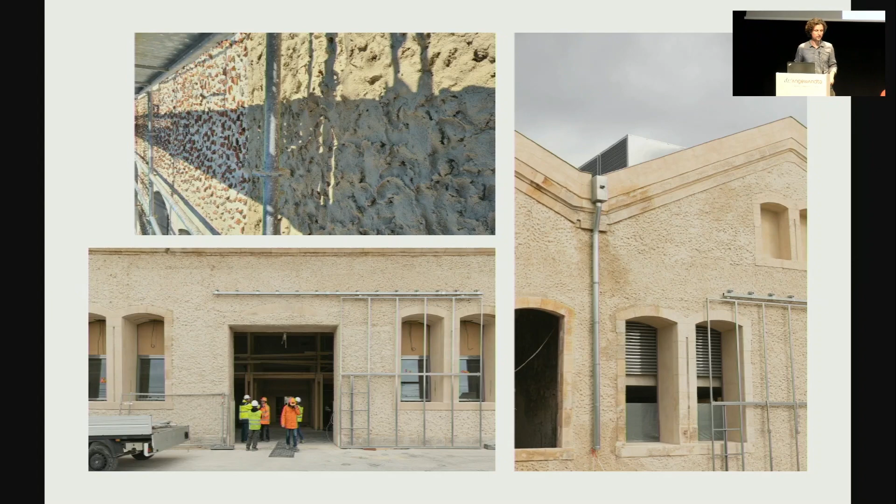Of course, all of these materials—this is a big project of around 7-8 million euros construction budget—so there was a controlling office there who never works with these kinds of materials. So a lot of discussion, a lot of learning together, how to test, what are the protocols, what do we demand of these materials in order for them to be used structurally, for insulation, and for acoustical absorption in this project. A lot of testing was done to turn these material prototypes into real building materials within the span of a specific project.

Here we see the rammed earth walls being constructed during the construction site. There was also a bit of a focus on reuse.

These are the tiles on top of the roof that were actually gathered—they were not good anymore to reuse as roof tiles, they had gotten too soft. So we used them as pieces, kind of aesthetical gravel inserts into the outside lime plaster, and also cut longitudinally as aesthetical writings of tiles into the lime terrazzo floor.

Algae plaster was a very new discovery for us, and we're going further with it even after this project. The algae has a very special quality—these were algae residues, so food production of algae also creates residues which are not pure enough for food, but for construction it's still okay, same as with straw and everything. So construction materials are very complementary to food materials.

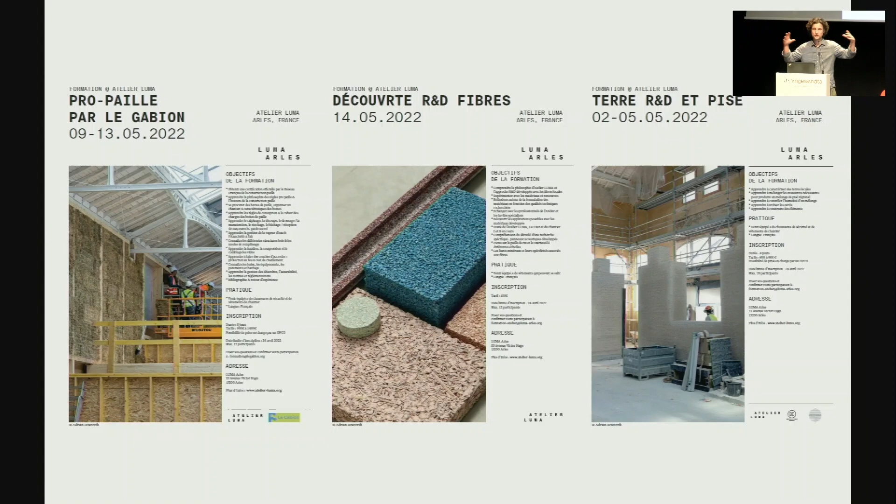So in fact, we did different algae plasters, and the binding qualities with specific types of sand—not all sands—are really amazing. We create very high quality plasters in terms of strength, in between clay plasters and lime plasters. Also a discovery for us were clay plasters made from washed clay from the sand quarry, and acoustical plasters on the right—you may not see it very well, but they're projected and left rough, with biosourced polystyrene from the sunflower head, which creates a porous and slightly elastic wall surface that's super good for acoustical absorption.

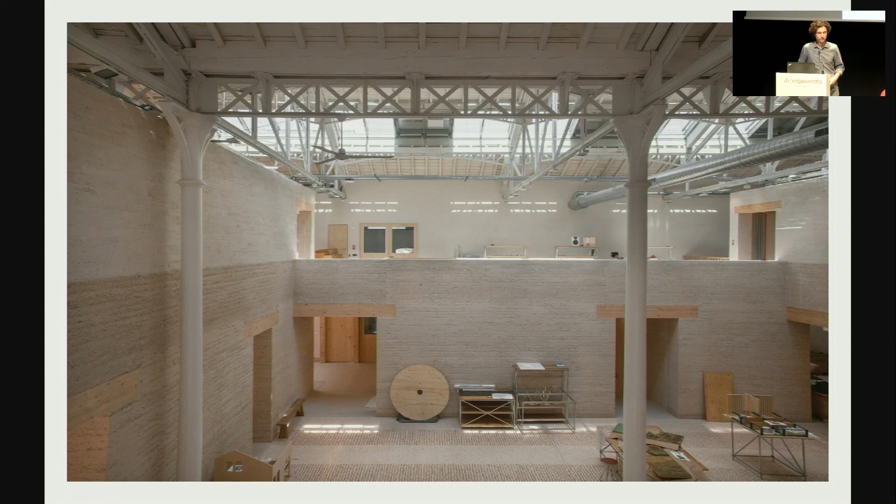So the sunflowers are used for the acoustical plaster. You can imagine all these materials, who is going to execute them, where are we going to test them, are they even allowed, the conversations to be had with the controlling office, with the stability engineers, and so on. A lot of discussion, a lot of network, a lot of dialogue, trying together, and these prototypes on site from the beginning gets everybody in a different mindset. Everybody, contractors, even us architects, to discover materials. These moments of prototyping were very important.

We also opened them up sometimes to people from Arles or further students who are interested in different types of workshops, in order to learn together, because that's the only way how we will move our big boat and the systemic change towards more ecological ways of building. It's to work on it together and to discover and learn together in prototyping phases.

And this is more or less the end result a few days before the opening. You still see the tables a bit on the side. A very beautiful light. The colors of the region, there's no pigments, it's just what we worked with. We used what we found and what we discovered. And it's very beautiful light, and in the end, a very special environment.

Doing all of these types of projects makes us also think, this is a project with a lot of budget, but not everybody has this kind of budget to invest so heavily in prototyping. And so that was for us the biggest reason to also start a company like BC Materials, to not only have our engagement linked to certain architectural projects that can pay for it and have the right context to go for it, but also to engage in a more broad way with our society in terms of what materials we should use. That was the starting point of BC Materials.

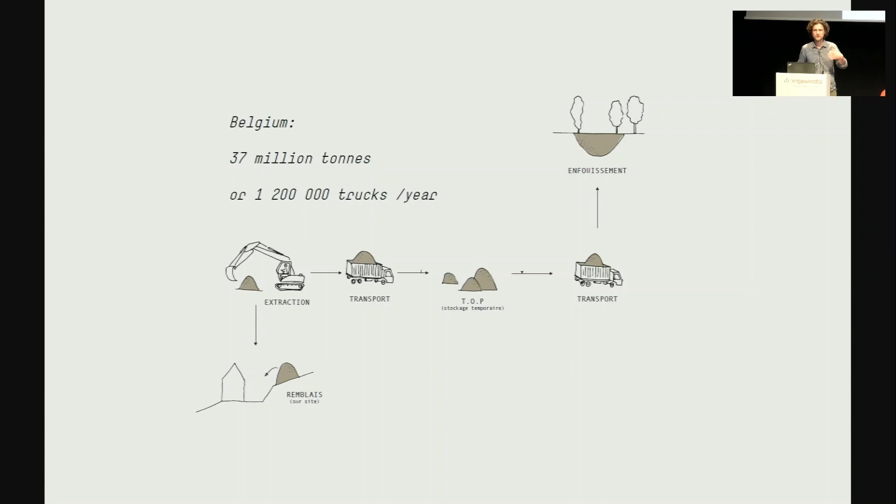We kind of took the same logic, but on a bigger scale, and we looked at what actually is happening in Belgium today with earth. If we look at excavation earths, so excavation from urban construction sites, where you dig out an underground parking garage for example, in fact only in Belgium, so you can imagine for Europe, only in Belgium this generates around 37 million tons of excavated earth per year. So it's an enormous quantity that is being excavated.

And it's very linear: around 40% is reused in landscaping works such as road construction, and 60% is thrown away in landfills, in quarries, and so on. Sometimes we go to Germany, to Netherlands, to France, because there's no place to do that in Belgium and the quantities are just too big. And so it comes with all this kind of problems of transport, CO2 emissions, and road congestion, and things like that.

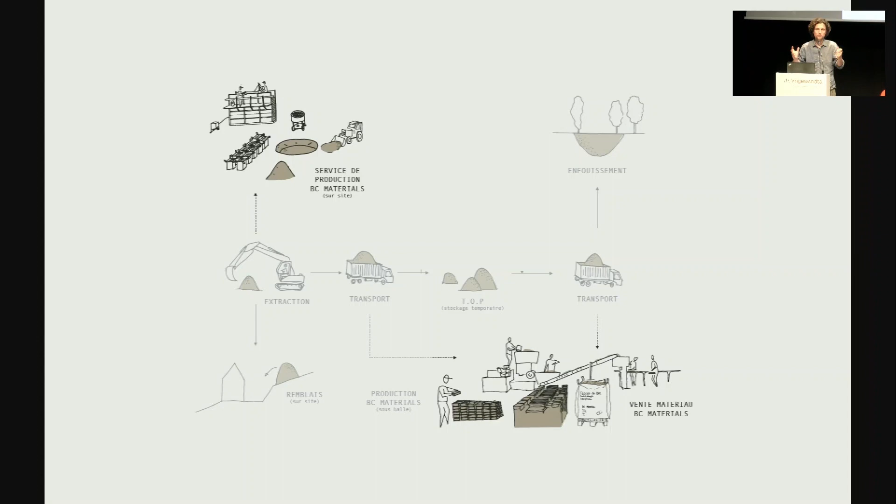So what we then said with BC Materials is, okay, let's act on this supply chain of earth. It's geological earth, it's non-polluted, it's non-disturbed, so it's the real geological layers, which is legally considered as waste, but it shouldn't be. This is just like we have all kinds of little quarries that every construction site actually is. And so we want to use those resources to make building materials.

And so we do that in two places on the supply chain. One is we go to the place of extraction, the construction site where they're digging out, in order to transform those materials. That's mobile machinery, it's small scale. For some projects it works. Or the other one is we kind of attach ourselves to the temporary storage centers where earths are gathered before they are being disposed of. And so that's our stock, our stock production, let's say.

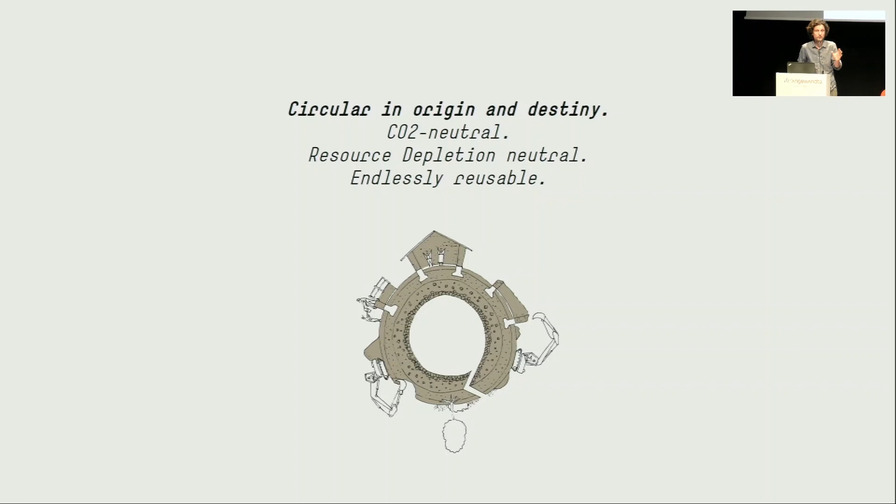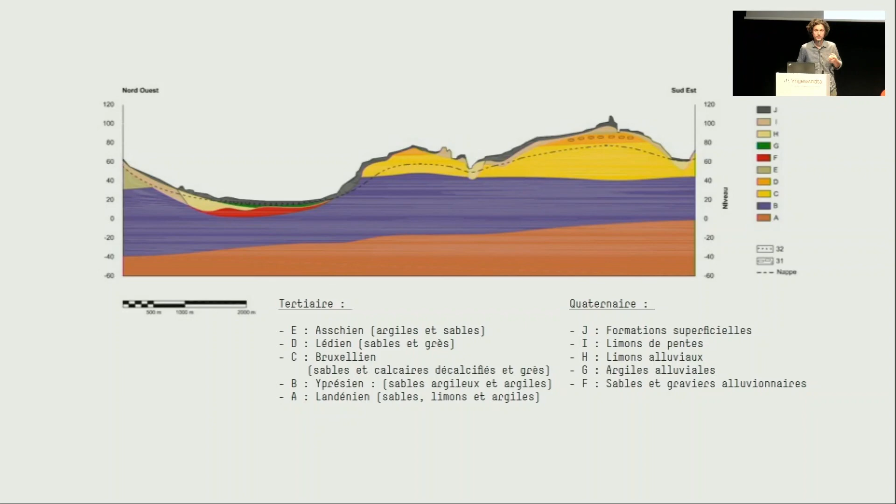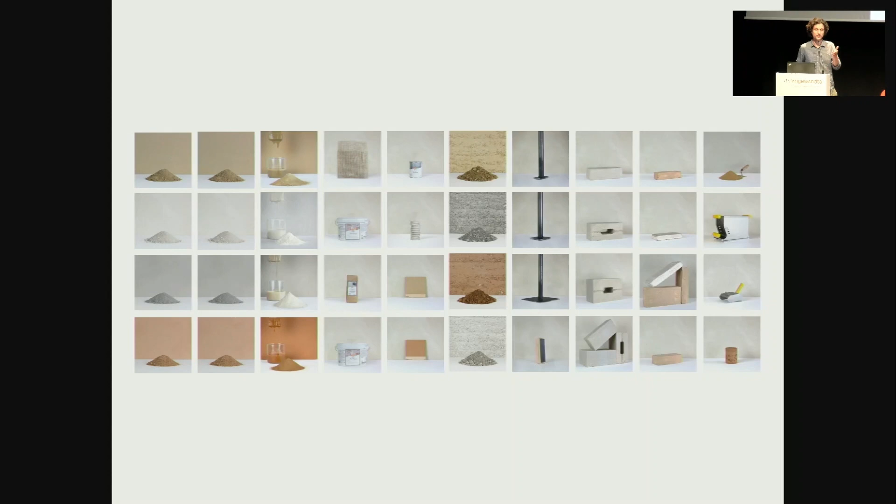So for us, why is this so obvious? Earth construction is for us like common sense. It has always been, and also very circular in the sense that you use something that is considered as waste, but you also use a product that actually never loses its qualities. We have done it already multiple times, you can scrape a clay plaster from the wall, re-wet it, and apply it somewhere else. So you're actually working with the soft crust of our planet and using this to build our infrastructure, which in geological time, in the long run, is in fact not used for a long time, maybe 50 or 100 years. And then you can just give it back to the earth, it's just earth.

So very quickly, this is a section of Brussels where we source our earth from construction sites. We see the yellow parts, which is High Brussels, historically used as mortar sand for making mortars, but today is legally a waste. Or the Valley of Brussels, where we find more clay materials.

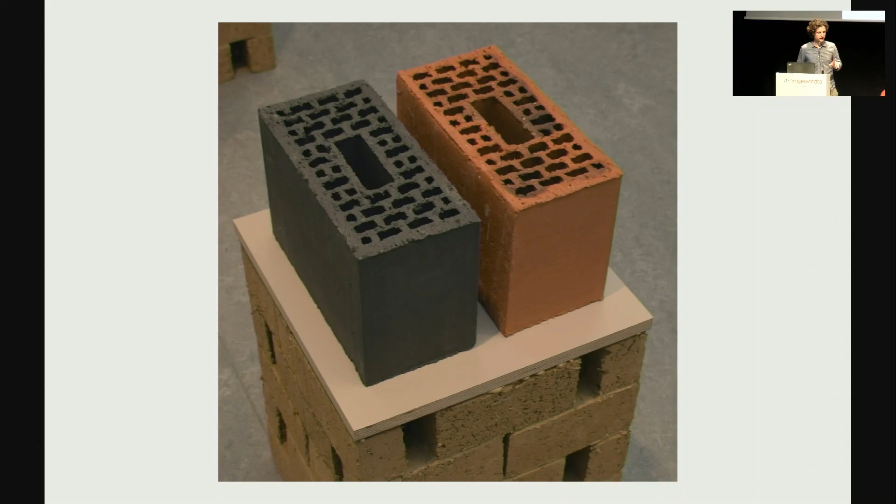So we developed a range that goes from plasters, fine plasters, paints, accessories, rammed earth, and in the end also compressed earth blocks and molded earth blocks that we now sell on the market.

And we do that not only as BC Materials, but through partnerships with production capacity available in Belgian society, capacity that isn't used 100%, and we say, let's do an industrial co-working, use your machinery, insert earth, and get quality products from it.

I'll skip this. Just to give you an example, you already see a bit of the different scale. These are compressed earth blocks, but actually made with concrete block technology. We're at an output of around 300, 400 tons per day, while before, using our little compressed earth block machine, we were at around 8 tons per day. So the scaling up is very important.

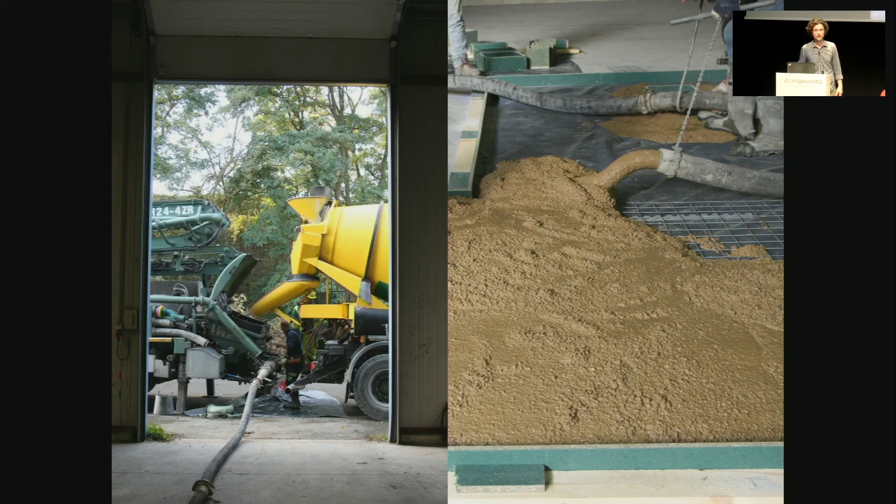This compressed earth block is really a very, very high quality, very good product. It became cheaper because of the upscaling, of course.

And then one last thing, BC Materials always wants to innovate. It never stops. We always need to think further about what materials we can replace, which fossil fuel intensive materials currently on the market can we replace.

For example, something really promising for us is this cement screed replacer. It's actually an earth screed poured with the normal machinery that the concrete guys already know really well how to work with. It's beautiful machinery.

They just put the wrong stuff inside, and you can also put earth inside. These people, at the beginning, they're like, wow, what is this? This will not work. I'm not putting this in my machine, no way. But then you talk and try the first little bits without risk, and then they say, it passes really nice in the pump. Okay, let's go for it.

So this is the impact that we need to have. This is the prototyping that we need to do together.

And so this results in a product range called Leem, that you can see on the website, leem.works. I invite you to check it out yourself.